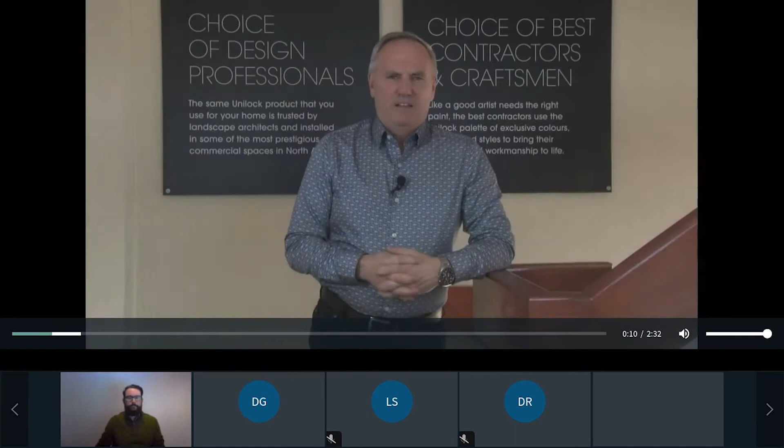Hello, my name is Dave Laurie, Sales Manager, Commercial Sales, Unilock Canada. I began at Unilock in 1997 during Unilock's 25th year in business. This year, Unilock is celebrating its 50th year in business. Unilock began with one paver named Unistone, available in a single color. We now have a 170-page catalog featuring a large variety of products. When I began at Unilock, I was one of 5 sales reps in Canada. We now have 18 sales reps, including our newly added Quebec business operation. Our sales have grown significantly, and the size and number of production plants have also increased, both here in Canada as well in the US, centered around the Great Lakes. Unilock began with commercial projects in 1972 with the Unistone, then grew tremendously in the residential marketplace, becoming a significantly well-marketed household product name for many years.

Approximately 20 years ago, Unilock began to renew our focus on the commercial world of spec build projects. Sales reps like myself in Ontario, as well in New York and Chicago, moved from an all-round sales rep role looking after both residential and commercial business to a focus on commercial work only. With a high level of focus on commercial work, the emphasis was on getting Unilock specified by architects, landscape architects, and engineers. This led to a significant focus on doing lunch and learn presentations to this audience, working hard to become the most sought after company for commercial projects, product supply for pavements and retaining walls. Like the lunch and learns that Unilock sales reps have presented for many years now, the company's long-term objective is to provide the most current information to ensure all the best practices are being followed in both the design and construction of the systems that Unilock products are used within. Unilock understands that not only do our products need to be of the highest quality, but the partnership between our firm and yours in working towards high quality installations is of the utmost importance. We are proud to bring to all of you our 2022 UTech Virtual Specifier Education Series. Thank you.

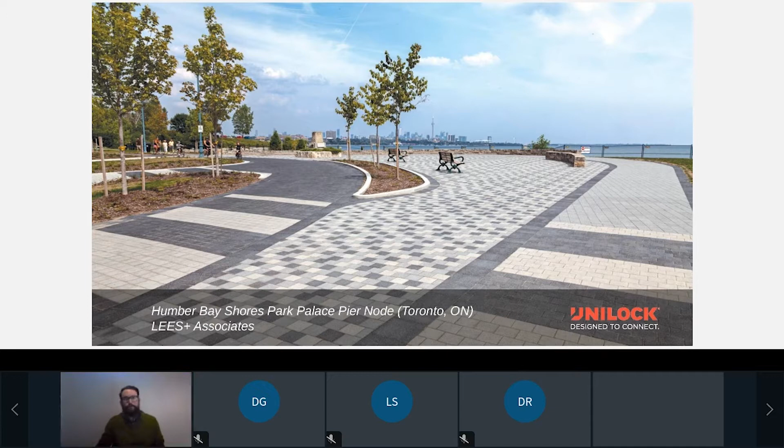Just going to have a quick look at our team. We have a large commercial team of professionals across Unilock locations across North America, all ready to assist you. We have 65 territory managers serving contractors and dealers in your area. We actually have David Roscoe, who's joined us today from the US, from our Ohio market. So for any of our American friends that have joined us today, if you have any specific questions on the US, please feel free to ask Dave.

Locally, in the GTA, we have a dedicated commercial sales team servicing the design community, engineers, and commercial contractors, with a focus on the GTA. We also have 4 territory managers looking after the outlying areas of Southern Ontario, from the Golden Horseshoe to the Ottawa region, and all the way north to the Georgian Bay region. We also have 3 project administrators to support our Unilock commercial team.

Here's just a look at some of our locations, or all of our locations rather. We have 18 manufacturing facilities spread out across 13 locations in Canada and the US.

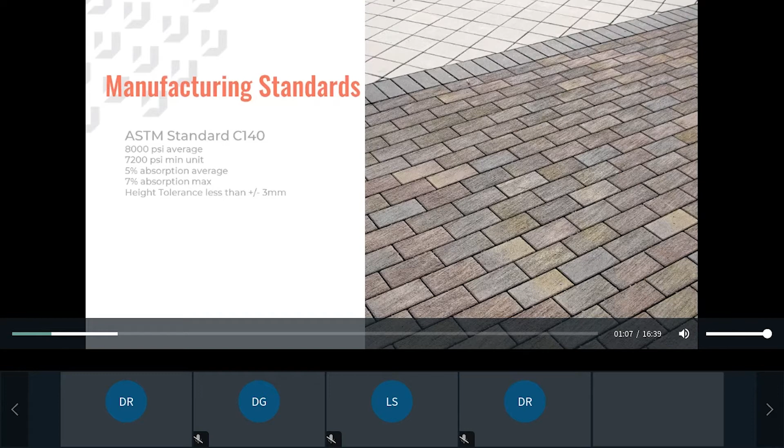Finishes. In order to specify concrete unit paving products, you must have an understanding of what is available on the market, so we will briefly discuss some of the finishes Unilock has to offer. Classic: our classic finish is tried and true. It is frequently used and provides a durable and familiar option when working with tighter budgets. These products utilize a traditional product mix of large and small aggregates that are consistent from top to bottom, with color mixed throughout. It is commonly referred to as through-mix concrete.

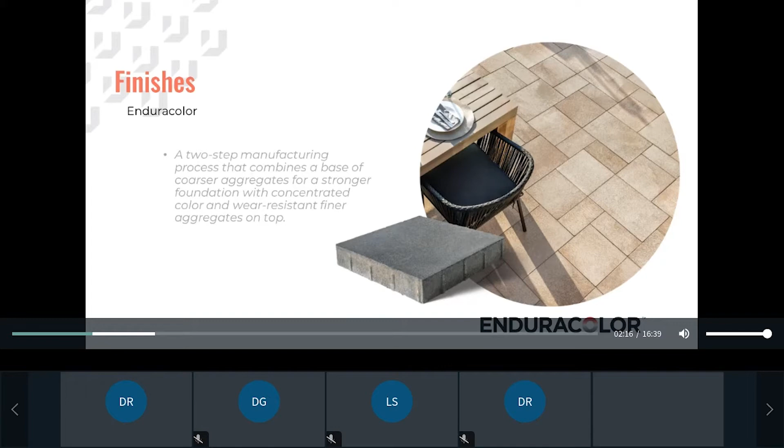EnduraColor: Unilock introduced EnduraColor, or face mix technology, in 1992. Endura Color is a two-step manufacturing process that combines a base of coarser aggregates for a stronger foundation with a concentrated color and wear-resistant finer aggregates on top. This technology allows us the ability to offer a range of unique textures and colors. The top of the paver also has a finer finish, so larger pieces of aggregate are not visible.

Elegance: our Elegance line is made using wet cast concrete, whereas other products use a dry casting method. By wet casting the pavers, we are able to offer seamless textures and colors. Our Elegance collection offers styles you can't get anywhere else. Additionally, our wet cast concrete unit pavers have a higher compressive strength for even longer lasting pavements.

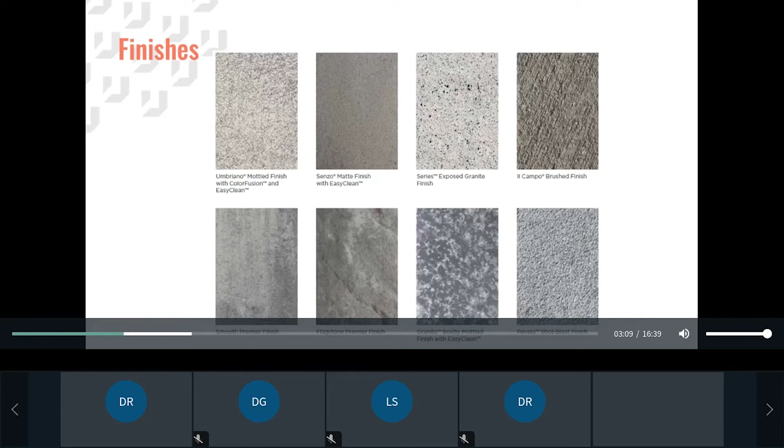Customization. Unilock allows you to customize products to suit your project's needs. Our vast array of sizes, edge details, finishes, and color options make it easy to achieve your design vision. Of course, minimum quantities would apply, so speak to your Unilock representative about the custom options available in your market.

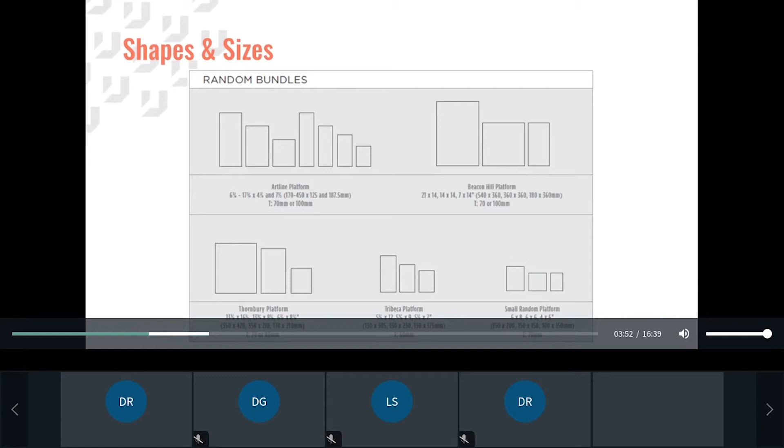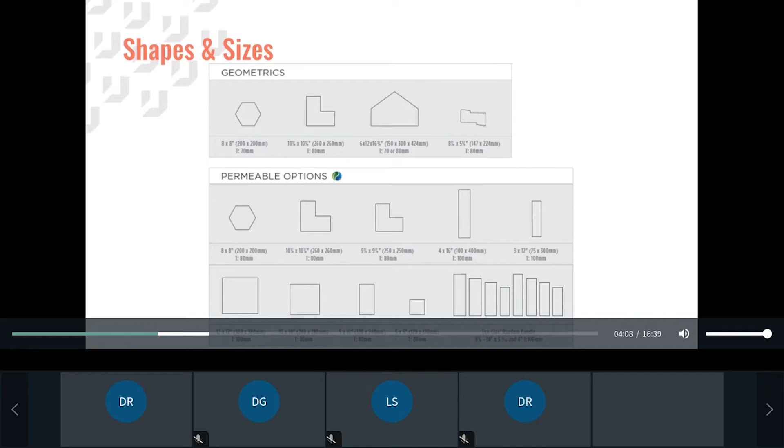Shapes and sizes. Unilock can produce product in a large selection of shapes, sizes, and thicknesses, from slabs and squares to numerous rectangular and plank paver options. We have random bundles in varying size configurations. We also have geometric shapes and a large selection of permeable paver options. We regularly add paver molds to our collection as needed, usually dictated by a designer's need for a specific size and shape. Reach out to us for more information.

Design considerations. Equally important to loading considerations are the laying pattern and aspect ratio of unit paving. When designing a unit paving system, we recommend, when possible, a herringbone or double herringbone pattern for areas that will receive vehicular traffic. Aspect ratio is a relationship between the thickness of the unit paver versus its longest side.

A general rule is, for heavy vehicular loading, a 3:1 aspect ratio should be maintained. For light vehicular loading, a 4:1 aspect ratio, and all other paving sizes are considered pedestrian only. Other specialized pavers such as our Optiloc, Bronte Street Paver, and our new Load Lock Paver are excellent for heavy vehicular loads due to their specific lock-up technology features. Of course, when in doubt, consult with your local Unilock rep, and we can go through all the options available.

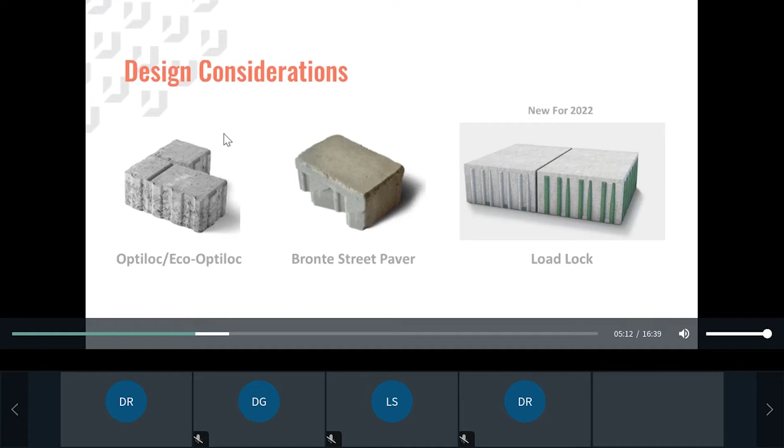Another consideration would be to design your pavement using a reinforced pavement structure. DriveCel is a reinforced soil structure product that enhances the performance of a pavement structure. I'll now play a short video to further explain how it functions.

The addition of DriveCel within pavement structures maximizes the strength, stiffness, and resilience. To help understand this, we will discuss how pavements fail, how DriveCel works to prevent failures, why this is important, where we can use DriveCel, and the benefits that DriveCel provides.

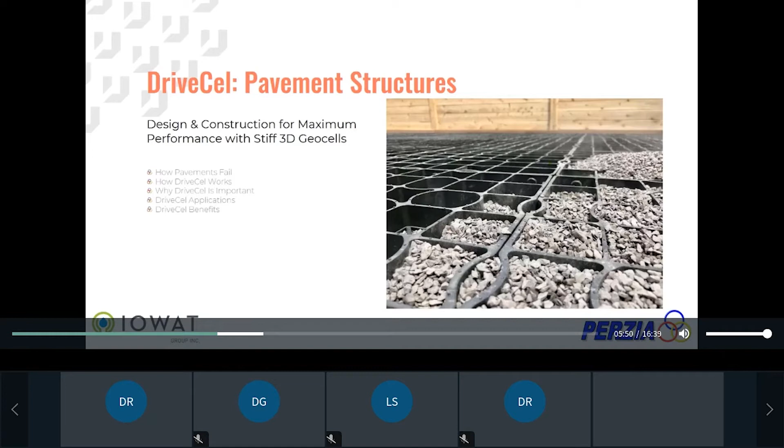Pavement structures are strong in compression but weak in tension. They can fail in different locations, from different causes and mechanisms, but ultimately they fail in tension.

DriveCel stiff geocells strengthen pavement structures by combining the best of both worlds from geogrids and flexible geocells, by reinforcing and confining. This results in the maximum strength, stiffness, and most importantly, resilience for flexible pavement structures.

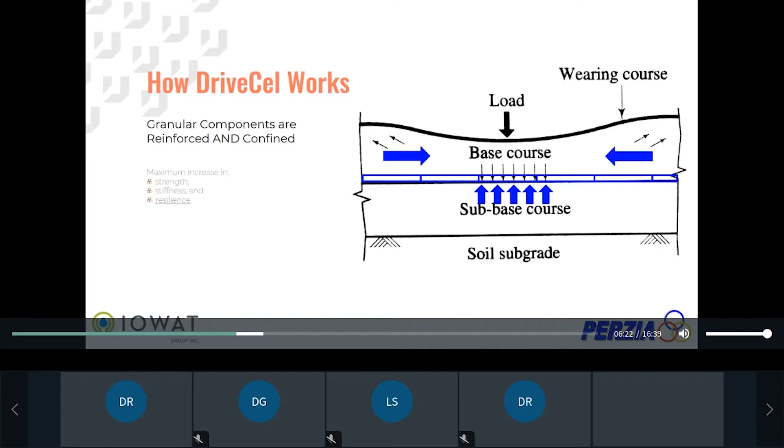DriveCel can be used in the base layer on decent subgrades, and directly on weaker subgrades like a snowshoe, to reduce the pressure on the subgrade.

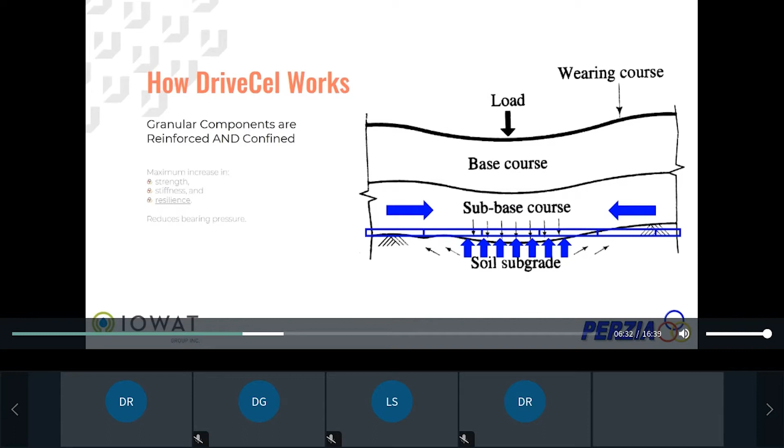DriveCel can be added into conventional unreinforced pavement structures to significantly increase their strength and performance. Or you can take advantage of the strength increase by reducing the thickness to reduce the excavation and granulars, while maintaining a similar or greater strength when compared to the original unreinforced section.

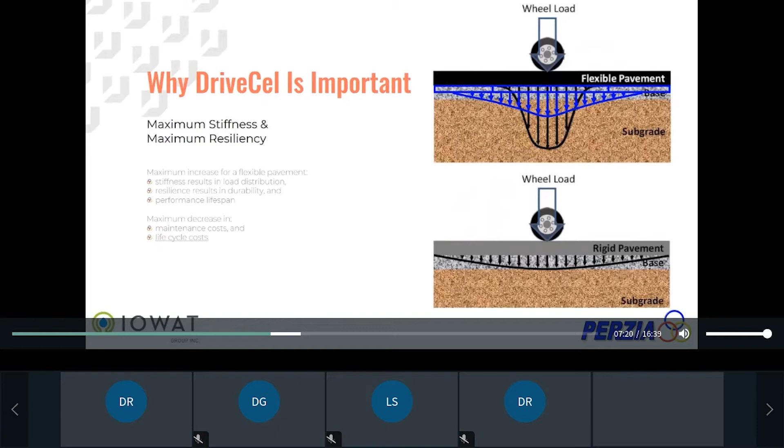Here is a comparison of the wheel load distribution for a flexible versus rigid pavement. In a flexible pavement, DriveCel maximizes the stiffness to increase the load distribution and maximizes the resilience to increase the durability. Together, these maximize the performance lifespan. Ultimately, this reduces maintenance costs and minimizes life cycle costs.

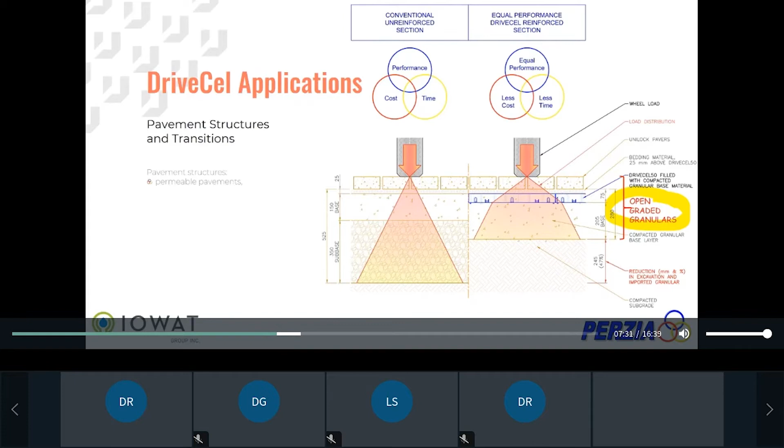For permeable pavement structures, the base and subbase are typically composed of open graded granulars. The design priorities are structural first and then drainage.

A rigid and impermeable concrete base layer is a mistake under a flexible and permeable concrete paver's driving surface. The concrete should be replaced with DriveCel. As shown on the very right, two layers of DriveCel can be used in pavement structures, one on the base and one on the subgrade, to further increase the reinforced strength and minimize the excavation and granulars.

Tension cracks typically form at transitions from one type of pavement to another. Installing two layers of DriveCel along the transition helps smooth the transition and prevent cracking.

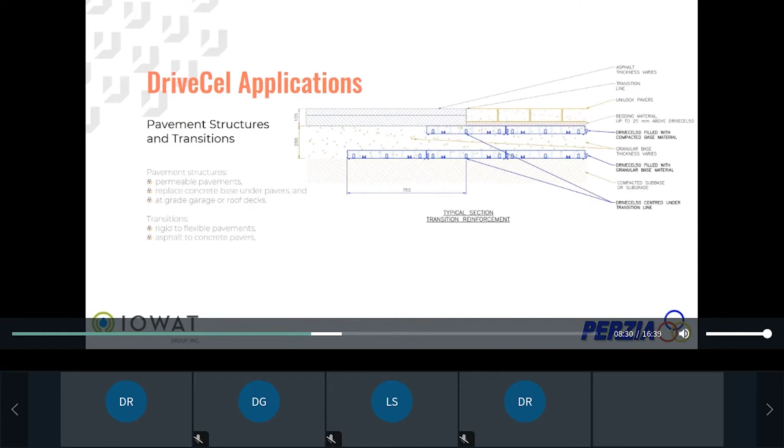Too often, pavements and curbs break up around catch basins. Installing DriveCel helps tie this area together to reduce costly repairs.

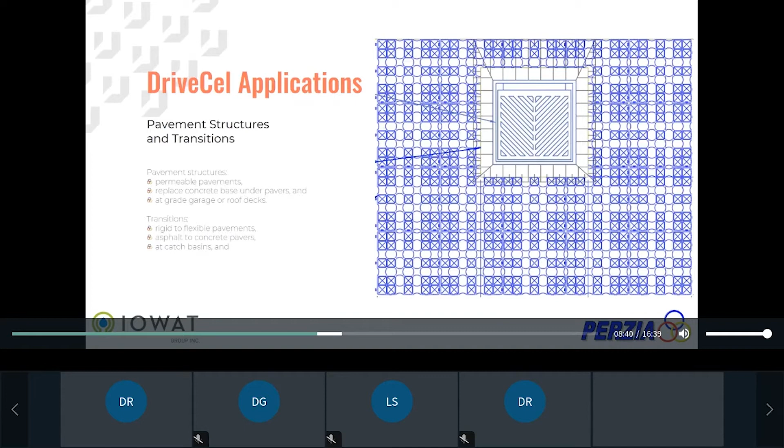Pavement structures often deform and crack over culverts. Installing DriveCel under the culvert helps spread the load and reduce the excavation required. Installing another layer above the culvert in the pavement structure helps prevent deformation and cracking.

DriveCel maximizes the long-term performance of pavement structures for maximum benefits. During construction, excavation and granulars can be reduced, plus installation is quicker and easier. This results in overall time and cost savings.

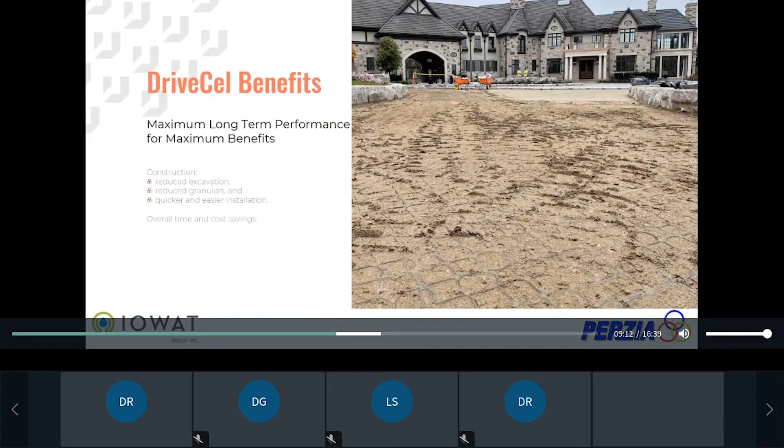Maximizing the resiliency maximizes the durability. This means more wheel passes, less maintenance, and smooth transitions.

Finally, using DriveCel has direct and indirect environmental benefits, including reducing export and imported materials, reducing truck traffic and related air and noise pollution, all while reducing the overall carbon footprint. Thank you very much.

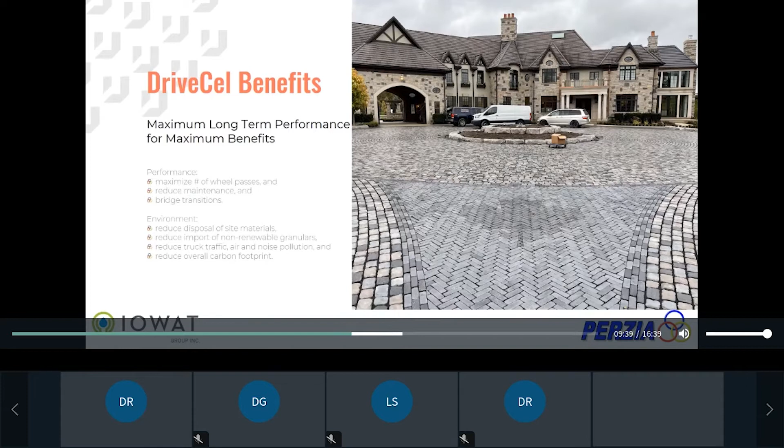Unilock Resources. As mentioned in the introduction video, we have a strong support system at Unilock. We have a growing number of territory managers in Canada and the US ready to assist you.

To go along with the boots on the ground, we have a wealth of online resources available on our website. Our website is constantly updated and is segmented into 3 target markets to better assist you: our contractors section, our home builders/homeowner section, and of course our architects and engineers section, where you will find helpful resources like product specification, numerous project images, cross sections, and hatch patterns, to name a few.

Our 2022 commercial and residential catalog of dreams are available for download on our website, or you can request a printed copy.

For the case study, we will be reviewing this amazing precedent project my colleague David Robbins worked on, Dundas Place, located in London, Ontario. The City of London had a vision to transform Dundas Street into Dundas Place, a public space and cultural hub to encourage residential intensification in the core, showcase built heritage of the area, and shape the downtown for decades to come.

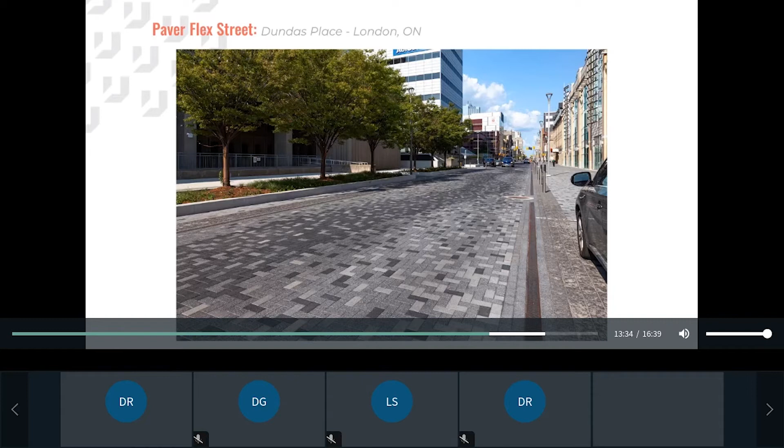The design emerged from the vision to replace the pre-existing traditional concrete sidewalk and asphalt roadway treatment with a uniquely designed interlocking concrete paver surface. The pavers allow for a seamless transition across both the vehicular and pedestrian areas, while providing roadside safety, accessibility, and engineering requirements.

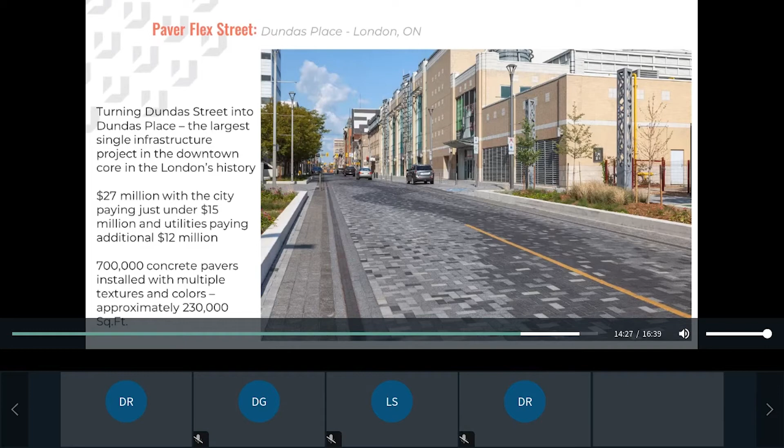The Thames River, a waterway that flows through the city, was a major hub of activity and played an important role in the history and development of London. With a desire to use Dundas Place as a gateway linking the downtown core to the riverfront, the river itself became the inspiration for the wave paving pattern meandering down the center of the street.

With such a detailed pattern, it was important for Dillon to team up with their Unilock rep, David Robbins, to further develop the wave-like pattern and to assist with any details.

Unilock was able to share our expertise through various collaborative efforts, including touring our manufacturing plant, reviewing completed projects of similar nature, to name a few.

With durability and accessibility as key design factors to consider, a custom color palette and detail pattern could easily be constructed with minimal direction once on site.

The various paver sizes, styles, surface textures, and colors help to define the pedestrian areas from the vehicular areas in a safe way. To ensure long-term durability, the pavers were installed over a concrete foundation.

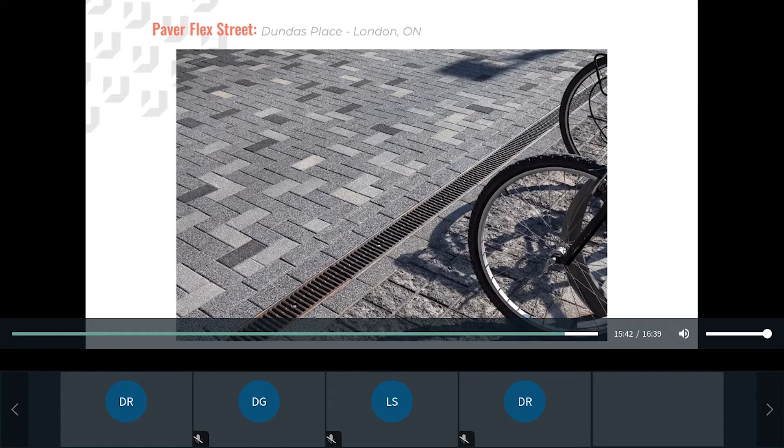Over 700,000 interlocking paving stones were laid in a herringbone pattern at Dundas Place. This laying pattern, combined with the base detail and the aspect ratio of the paving stones, are key design considerations when designing for vehicular movement, allowing the paving surface to support both pedestrian and heavy-duty car and truck traffic.

Here are some of the unique features of this flex street. The paving pattern mimics a river. No curbs, making it great for accessibility. Textured pavers delineate the pedestrian zone from the vehicular roadway. Removable objects, including seating, bollards, planters, and some of the lighting.

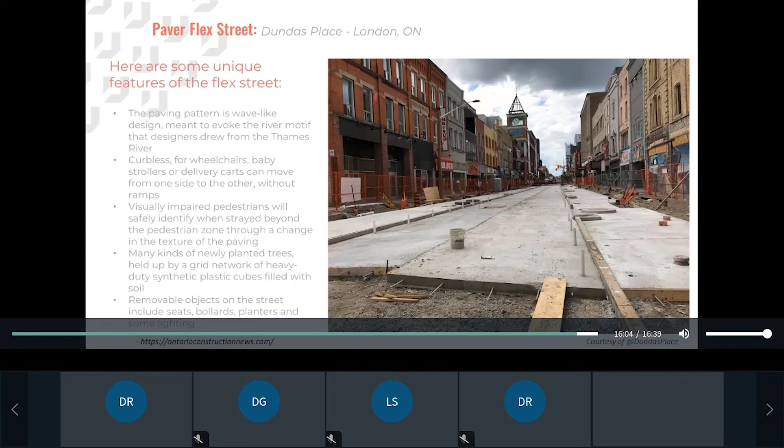Dundas Place has already proven the extent to which the program fulfills the vision set in London's downtown plan to make Dundas Street into the most exciting street in London.

Dundas Place was not just a street reconstruction project, but is part of a long-term strategy to re-envision downtown London. Dundas Place is a dynamic and inviting destination in the city and has become the benchmark for future flex streets in Canada.

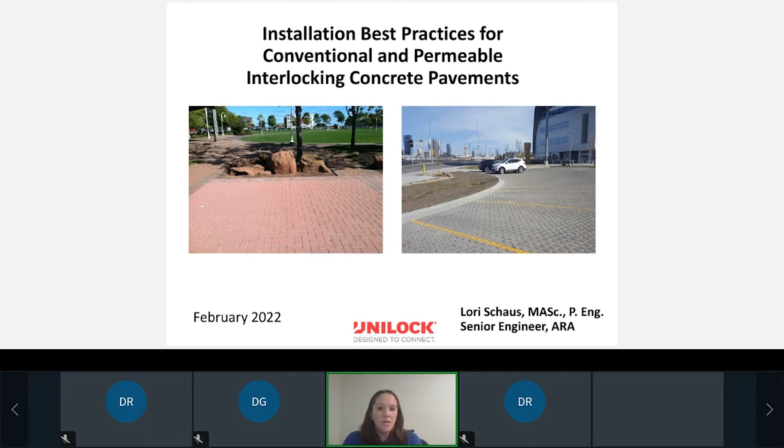So today I'm just going to show you a couple examples of what conventional and interlocking concrete pavements are for those that may not know. I'm going to go through a little bit of really basic pavement design and what we do as designers and what we're looking for. I'm going to talk about some of the bases and sub-bases we use to support our pavements, and then key features, materials and installation. And then we're going to talk about best practices, which is really a bunch of pictures of what not to do, and hopefully we can learn some things here.

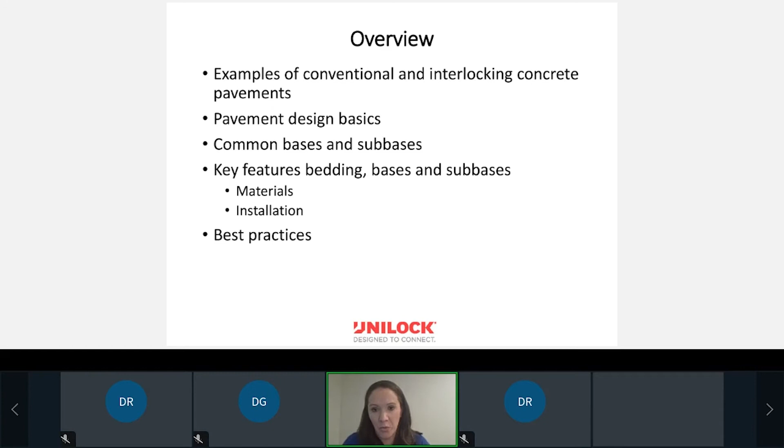So I have a lot to cover, so I'm going to touch on just some key points. There's lots of information out there to help you if you want more details, or we can discuss in the questions and answer period at the end, or offline as well. So I'm just going to run through some stuff a little bit quick, but I hope you'll learn something.

I want you to understand just a little bit about the basics of pavement engineering and what we're thinking about when we have to design these systems. Understanding the importance, particularly when we're talking about interlocking concrete pavement, of your bedding, your bases and your sub-bases, also including your subgrade, and then recognizing good practices.

All right, so interlocking concrete pavement, or ICP. Let's just generally look at what they're good for, and unfortunately, what are some of their disadvantages. One of the really great things, and Danny had a really great presentation there that highlighted some of the good things, is that we can do lots of fun things with them.

We can do colors and textures and different layouts, and landscape architects love this because they get to be really creative. From my perspective as a pavement engineer, I like that I know what we're getting - those blocks are manufactured to ASTM standards, as Danny said, so I know what we're getting. The problem with some other pavement options is you don't know what you're getting until you actually get it into the field. That's one of the nice advantages - we get these blocks delivered with high quality standards already in place.

If you compare it against concrete pavement, typically over the long life cycle cost, they tend to be cheaper than concrete pavement. One of the things I absolutely love - I did a major project on utility cuts. Utility cuts are the bane of my existence as a pavement engineer, because nothing hurts more than doing a brand new road and then having someone rip it up to put a utility cut in. A paving project is really great because you can pick up the pavers, dig, do whatever you need to do for your utility, whether installation or fixing it, put the pavers back in place, and most people won't even know what happened - which doesn't generally happen with concrete or asphalt pavements.

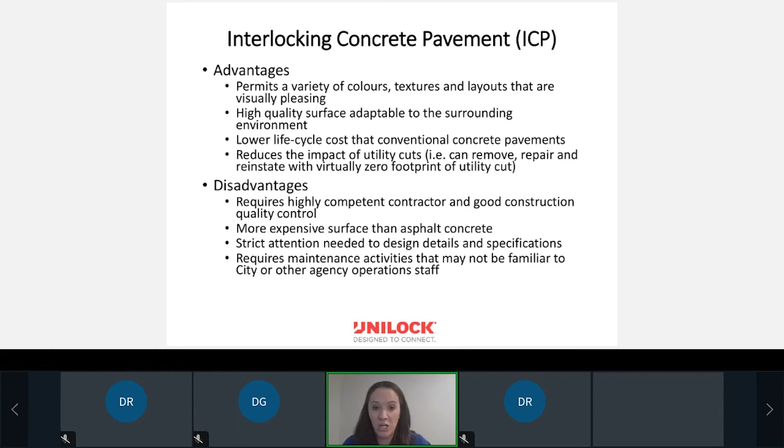Again, real special attention has to be paid to these kinds of things. And on the maintenance side, we want to make sure that operations and maintenance staff, for those that work in municipalities, understand that these pavements are different and how we maintain them is different. We're not just going to throw cold patch in them if there's a problem with an area of the paver. So sometimes there's retraining of city staff because it's not just how we've always done it. Those are all really key things we need to keep in mind.

Just a couple quick examples of some of the interlocking concrete pavements around. City of North Bay has one that's almost 40 years old. It's considered what we call a flexible pavement - I'll talk about what that is in a minute.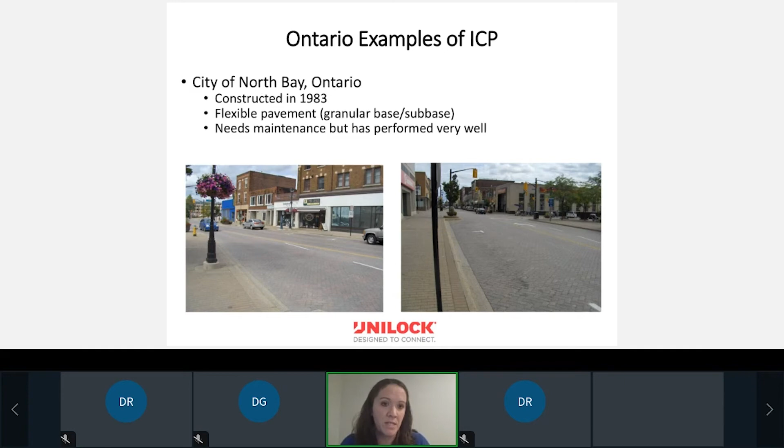It's sitting on a granular base. It needs a little bit of maintenance, but it has performed really, really well.

Dundas Place, I use that example as well. I was born and raised in London, so I'm very, very proud of this project. Dundas was not the best place to be growing up when I was a kid, so this is absolutely amazing to see. Again, as Danny described, you've got the wave mimicking down to the Thames River at the waterfront. Wonderful project, lots of neat things. I've got more pictures from that coming up in a few minutes.

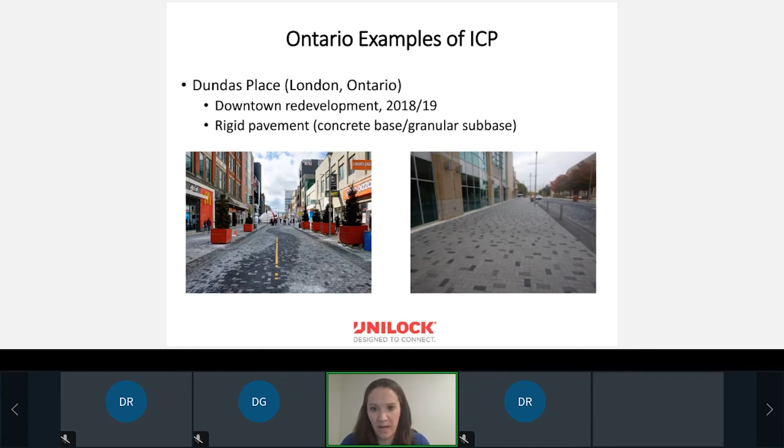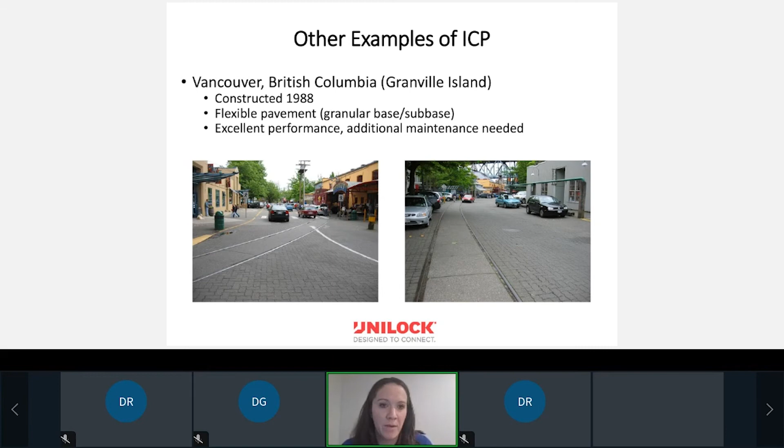Now let's go to Western Canada, Granville Island. It was constructed also in the 80s. Again, it's a paver project considered a flexible pavement on granular sub-base material. It's performing excellently, although as with most any type of pavement, there's always some additional maintenance generally required.

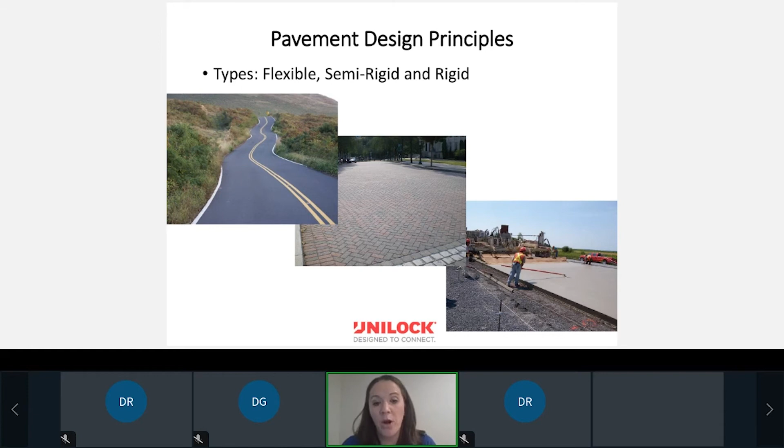All right, so let's quickly touch on pavement design principles. There's really three principles, but it comes down to two. The first is flexible - that's what we see with blacktop or asphalt, flexible pavement. The idea is it's meant to move, meant to be flexible. Then we have pavers, which fall into what we call semi-rigid, because the pavers themselves are rigid, but it behaves more like a flexible pavement - we treat it like a flexible pavement when doing design, so it's semi-rigid or flexible. And then on the bottom right, we have traditional concrete, or Portland cement concrete pavement.

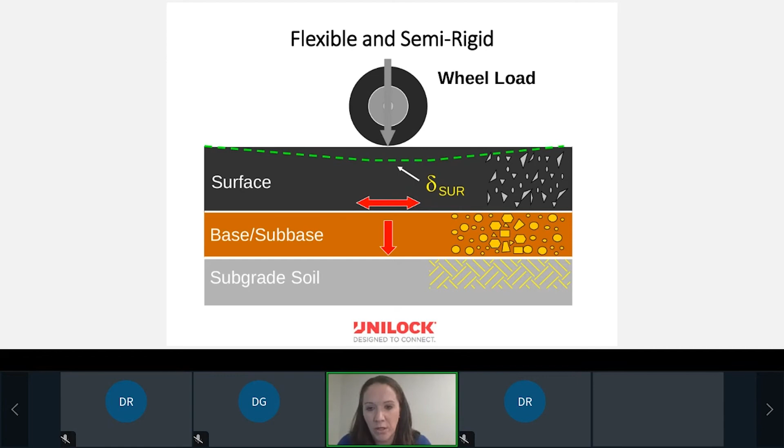So really quickly, flexible and semi-rigid - we saw a little video there just previously. What happens when the load goes over a flexible pavement? You get higher stresses right underneath the load, and then it filters down into the base and sub-base and into your subgrade soils. So when we talk about pavers or asphalt, that's what we're talking about - you've got movement, direct high stresses right under the load. For rigid pavement, or Portland cement concrete pavement, the load is spread out over the concrete slab. There are various reasons why you would do one or the other - they each have their advantages and disadvantages.

In terms of design specifications, information, and design tables, the ASCE, the American Society of Civil Engineers, has design standards for both traditional interlocking concrete pavements as well as permeable interlocking concrete pavement. They are available for you to use, and they are really great documents, constantly reviewed and updated on a 5-year cycle. There's lots of great information in there to help you if you're looking for design guidance on either type of these pavements.

Just a quick thing on how we do work sometimes: we try to figure out what kind of base we're going to do under a road. So this is an idea of what we call an equivalent design comparison. We're using the pavers, we're using the bedding sand, that stays the same, and then we look at various ways of what is going to support our pavement.

A traditional would be your base and sub-base made out of granular materials, that's on the far left. Or we might do an asphalt treated base, an ATB, in which case we can actually make the total pavement thickness a little bit shallower. Cement treated base, we can do asphalt concrete underneath, we can do porous concrete, we could do porous asphalt underneath. We could do lots of different things, and we can do some grid products as well.

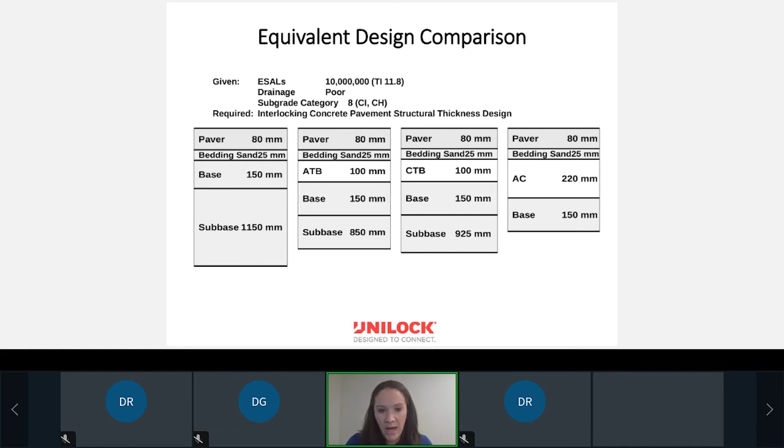So there's always pros and cons to each of these, and we try to use them wherever the site conditions require. There are hybrid products available to use in different forms of pavers and different things like that. Again, the structural grids that we've seen, those kinds of things, lots of different options out there depending on your site-specific requirements.

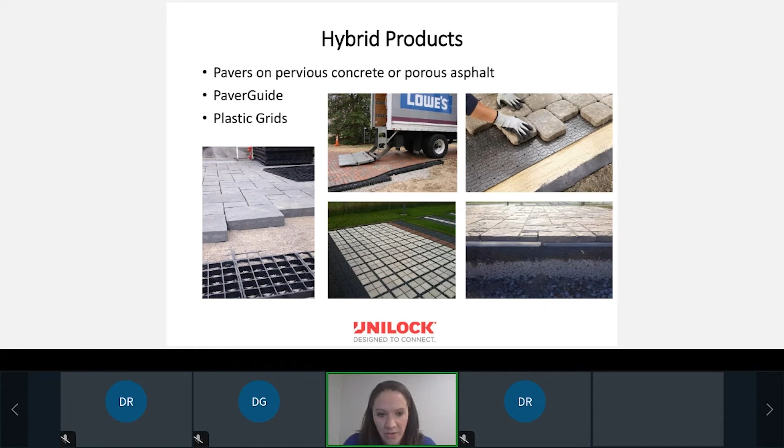So some of the key features of pavements: we've got materials, and this is really, really important. It starts right from the bottom - your subgrade or your foundation, what is it sitting on? We need to understand what it's sitting on, because then we have to design it properly based on those conditions. Then we've got our base and sub-base materials, and we decide what we're going to use for that.

Then we have our bedding and our pavers. Each of these all have to have details and specifications that need to be understood so the whole pavement system works properly. Once we've decided on the design and materials, we have to make sure it gets installed properly, and this is always a problem in all construction. We need design, materials, installation, construction, and they all have to be working cohesively. So it's really important that installation is really, really detailed and paid attention to.

Again, related to our subgrade, we want to make sure we have uniformity in our subgrade. Our pavement layers, are they designed properly? Are we using the right materials, and drainage? If you learn anything from what I'm about to tell you this afternoon, the keys to pavement design are drainage, drainage, drainage. You have to have proper drainage or the whole system can fail, with the exception of permeable pavements, which is something totally different. But we want to make sure we have drainage, because everything can go really wrong really quickly if we let water in. Water is very evil to pavement engineering.

So let's talk about subgrade. Subgrade is really important that we know what it is. We can estimate it, but we'd really like to know what it is. So one thing we want to make sure - do we have consistent subgrade down there? And then when we are dealing with it, we want to make sure we're compacting it properly. We do not want areas of non-uniformity. So we don't want a pocket of clay beside sand, or a frost susceptible material mixed in with other subgrade types, and we want to make sure it's compacted.

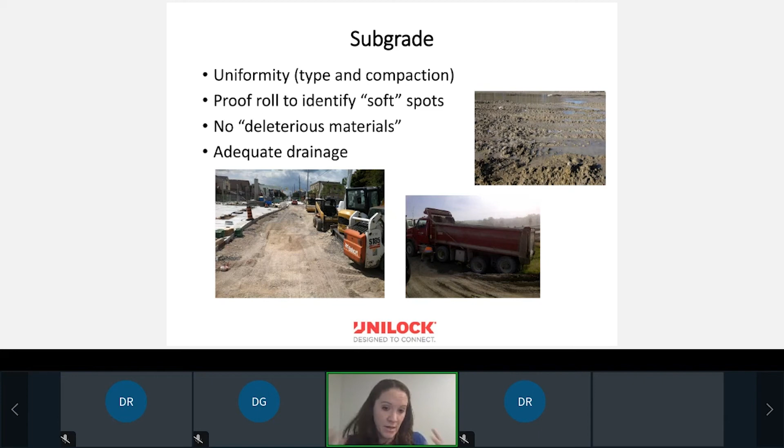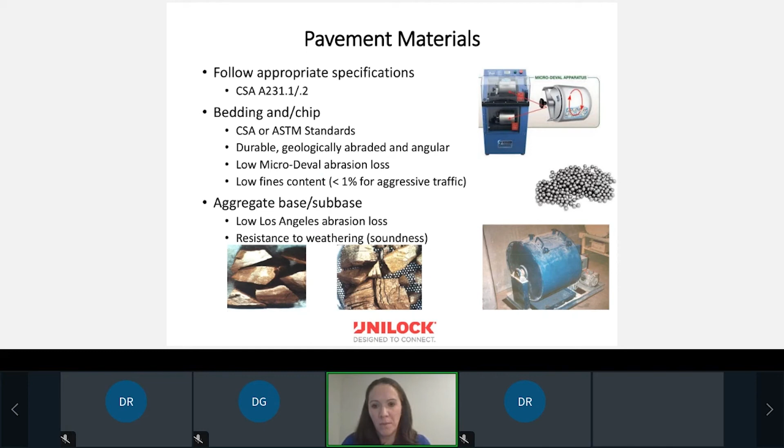Just a comment on equipment. We want to make sure we're using proper equipment for the proper jobs. Let's be using full 5-ton rollers for roadways and plate compactors for smaller areas. We don't want to be using a plate compactor on a major road. So again, appropriate equipment for the type of work that you're doing on your site.

Geosynthetics or geotextiles, different forms of that we can use in our pavements. Sometimes we use them for structural improvement, layer separation, filtration, drainage, and waterproofing. Again, all of these are site specific - that's why it's very important. No two designs are similar. You want to know everything about your site and what you might need something like this for.

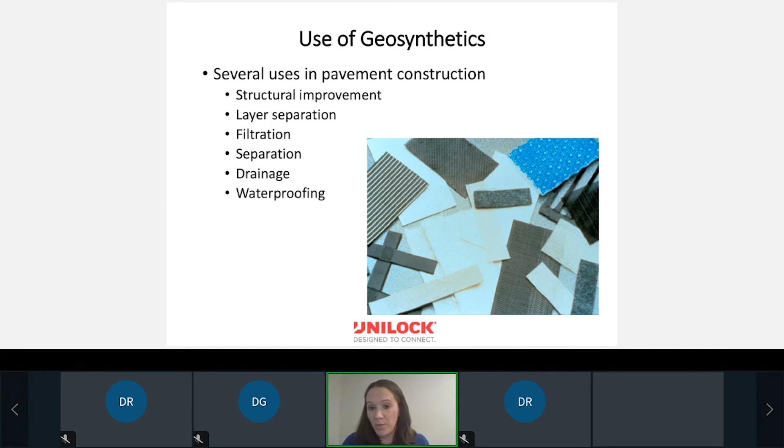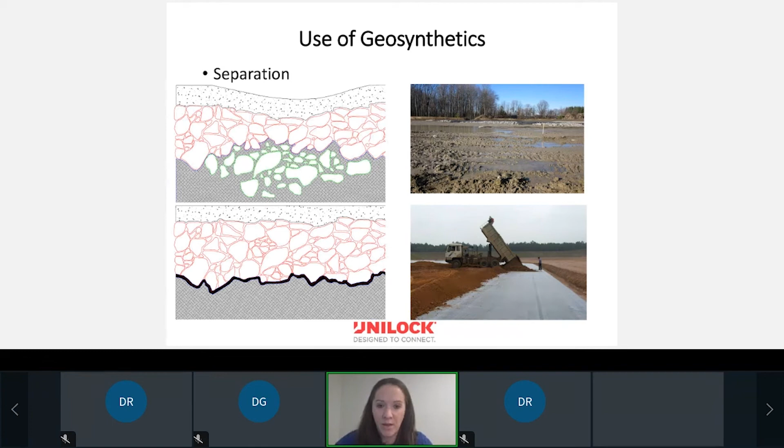So here's an example of separation. Again, I talked about uniform subgrade - well, subgrade is really expensive to sub-excavate, so sometimes we have to find an engineering solution to deal with it. One of those might be using a geosynthetic to provide a little bit more stability so that we don't lose our base and sub-base material into the subgrade, and then we start to get a whole bunch of problems associated with that. So separation can be used.

This is a permeable application where we're using it to separate some of our layers, just to make sure our layers were staying where they were, because in a permeable application we don't get nearly the compaction that we would under a normal pavement section.

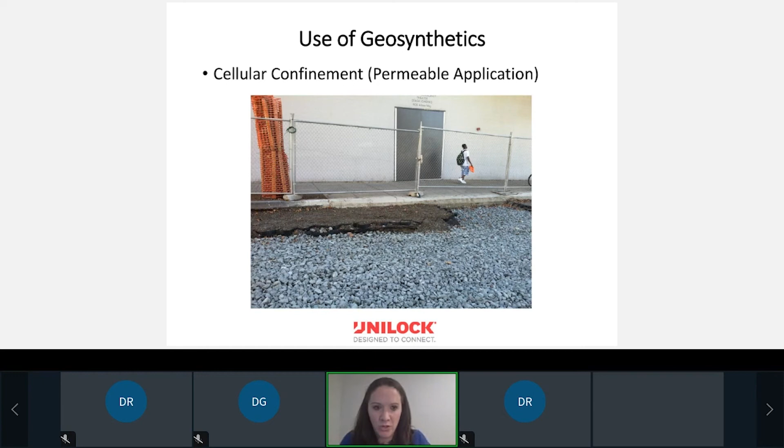We've used them in cellular confinement type areas. This is Allston Way in Berkeley, California. And when we got to the tree roots, we couldn't sub-excavate near them, so we had to bring the pavement structure a little bit thinner. We used cellular confinement around the tree roots in order to protect those trees, but also give us the strength required to support the traffic.

It can be used on driveways as well. Here's an example using it for structural reinforcement going up against a concrete foundation wall.

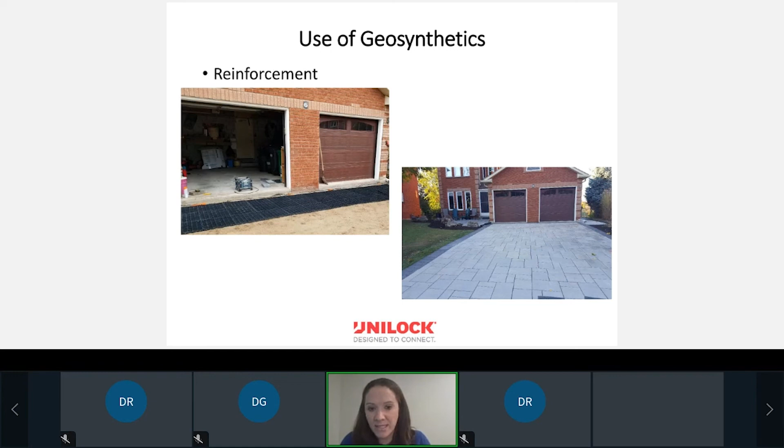So I'm going to briefly talk about permeable pavements. This is a completely different way to think about pavements - it's a stormwater management best practice. In this case the pavers themselves are not permeable, but the joints between them are. So instead of sand between them to get your interlock, they're a different type of paver, and we put a joint filler with bigger joint filler stones with no fines in it, and the water filters through into our base or subbase.

Once it gets into our base or subbase, we've got open porosity here - this is our storage reservoir. Water is going to stay there for maybe 24 to 48 hours, depending on our hydrological goals. Then either it's going to infiltrate into the subgrade, or in this picture, there's a geotextile forcing it into a subdrain. The point of this is to slow surface runoff down - instead of racing off the pavement into the curbs and catch basins, we slow it down. This is stormwater management where we're balancing structural and hydrological things.

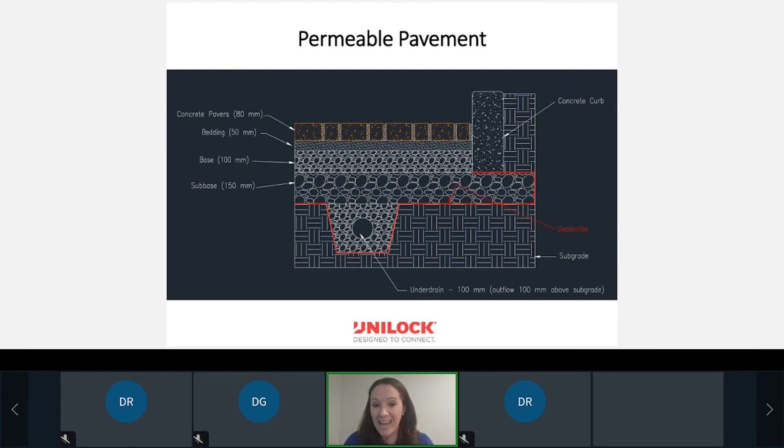So on permeable pavements, the materials look a little different - there's no fines, absolutely no fines. We've got our subbase here with big rocks, right? We want that high porosity.

You're talking 30 to 40% porosity in your subbase. Then we've got our base material, a little bit more structural component, but still high porosity. And then we see our joint filler there as well.

Really important in permeable pavements, the materials have to be clean, no fines, because these types of pavements will get clogged. We don't want to start clogged. We want to make sure we're getting the maximum porosity at the beginning, so we've got to make sure those stones are cleaned.

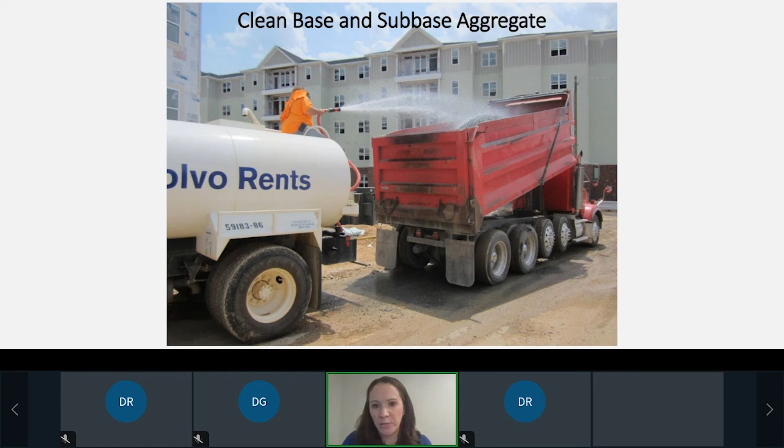When we're doing subbase and base preparation for permeable, it is different than if we're doing conventional pavers. This time we do need compaction, but not at the same level, because if we over compact a permeable base or subbase, we will lose our porosity. So it's a balance between getting some compaction for structural support while maintaining our porosity.

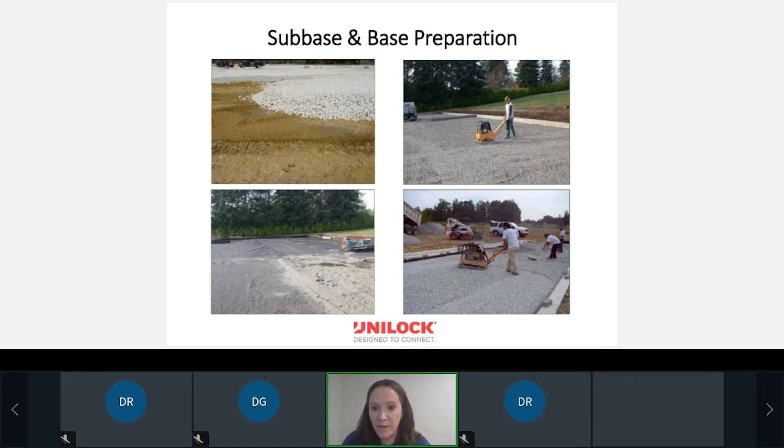So again, it's very important that the contractor understands how to do these, that the specifications are written properly, and that all the stakeholders for permeable pavements understand that this is not how we've always done it, or how we do conventional pavements.

Paver installation, for permeable or conventional, is the same. We highly recommend some kind of mechanical installation. Obviously it makes it more efficient, and there's health and safety benefits for the workers involved.

One of the beautiful things about pavers is there's no curing. Again, they come to site ready to go, so once it's ready, we can open to traffic fairly quickly. And the nice thing about pavers is they can always be reinstated after repairs or if they're damaged.

Back to one of the questions about paver supply, always make sure that you are ordering more pavers than what is required, because you will need them to replace damaged pavers, utility cuts if you need them, those kinds of things. So always important to have a little extra pavers on hand.

Very, very important: for the permeable paver, the joint aggregate installation is really important. Again, we need it for that interlock of our pavers, but then we also need it to pull that water in through the pavement. So as you can see, there's no fines. It's spread into the joints, compacted in, and then this has to be maintained. It has to be cleaned out and reinstated on a somewhat regular basis.

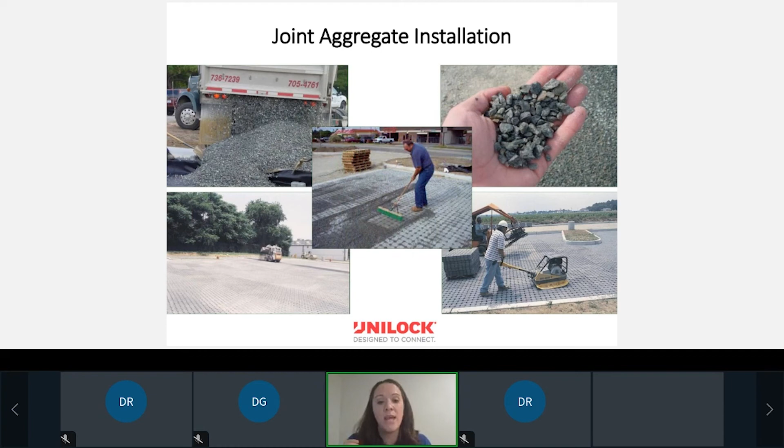Really, really important. At the end, this is just kind of a cross-section of what a completed permeable pavement would look like. So if you're used to seeing traditional, conventional pavements, it looks very different. As you can see, there's no fine materials here at all.

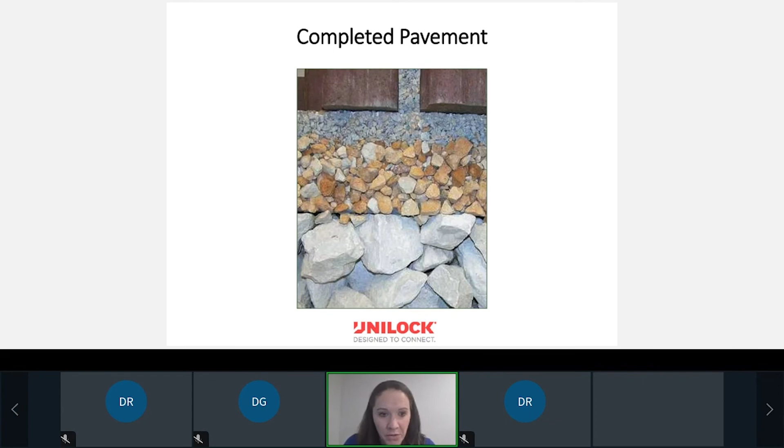All right, so let's quickly get to some of the installation and detailing, I'm going to run through this. Again, uniformity is really important at the subgrade level, at the materials. We want to make sure uniform compaction, uniform materials. Otherwise, that can start to increase our rate of deterioration.

Thickness design is really important. We want to make sure we're designing for vehicles, pedestrians, understanding what is going to be using it - that's our loading. Again, the materials for permeable and conventional are very different, so we want to make sure we're using the correct ones.

Again, uniform support for the pavement is really, really important - what are you building it on, what's your subgrade? I'm going to talk about some edge restraints that are really important for pavers. We want to make sure they have something they can push against under loading, and that they're not going to just slide away on us.

Drainage, again, very important, both surface and subsurface, particularly really important for our conventionals. Again, water is absolutely detrimental to a pavement.

And then how we actually install our paving units - this is a paver job that is on concrete. So the key with concrete here is we've got to build a concrete pavement properly too. Concrete likes to be square, so we're going to make it square, or it will make itself square. So we make sure we put in the joints before, proper jointing of all the concrete, and then we put the pavers on top.

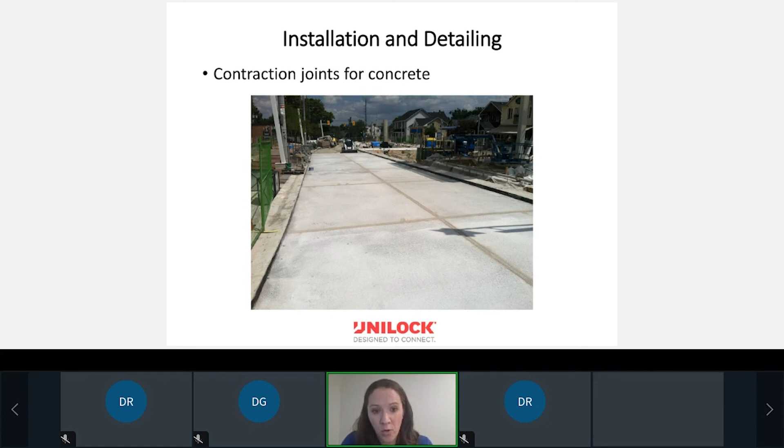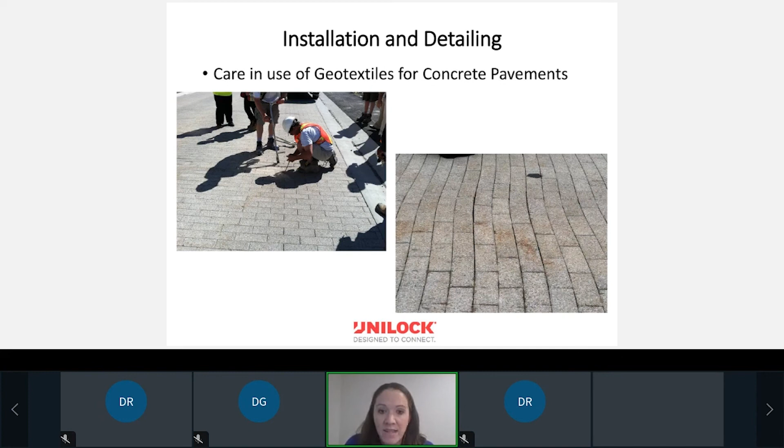Here's an example of where a geotextile was used between concrete and pavers. We have to make sure it goes down properly, or we could get some horizontal shift. And in this case, this was opened up, and what had happened is it was not installed properly.

It shifted the bedding sand, and then the pavers shifted around. It doesn't look very nice, and you're losing that interlock, and it's now not performing as intended.

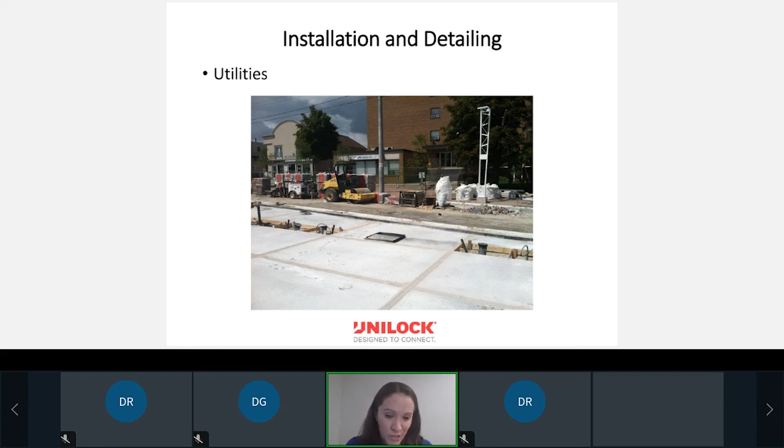Here's another example of our utilities. Utilities damage pavements, so we want to make sure people have access to them. The more detail we can put around our utilities is really important, because believe it or not, the utilities have the right to be there, although I wish they didn't, and they have to be able to access them to repair or install. So we want to find nice ways for them to get to their utilities.

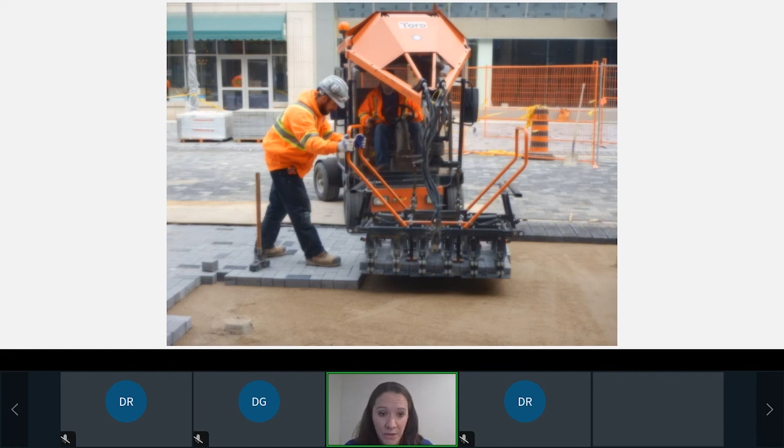Here's just a picture of mechanical installation. Again, it's efficient, and for the health and safety of our workers, really, really important.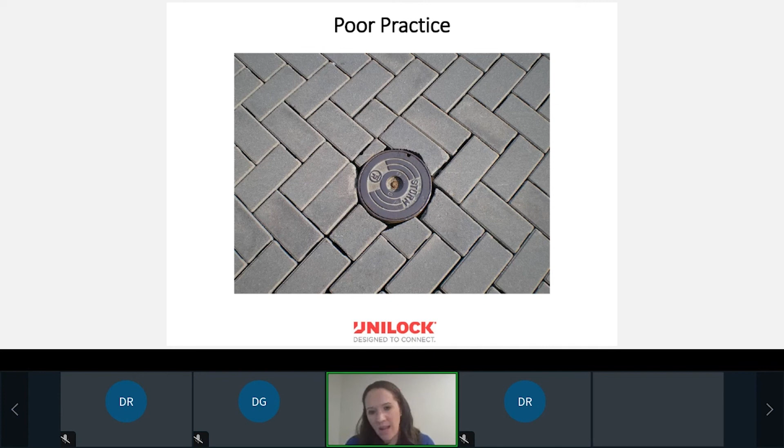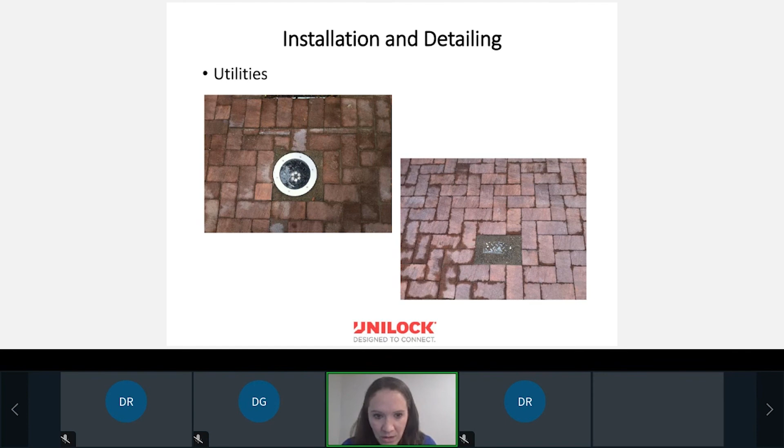Here's another example where they didn't even bother to put the pavers close to the utilities. You might as well just put a big sign saying 'water come here right now.' So water's going to infiltrate into that right away. Those pavers are going to start to move, and it's going to wash away bedding sand.

Here's Dundas Place again in London. We can see the detail around the utility cut cover here is perfect - it's a concrete collar, nice paver cuts. Again, not all of them are perfect, but minimizing small cuts is best as possible.

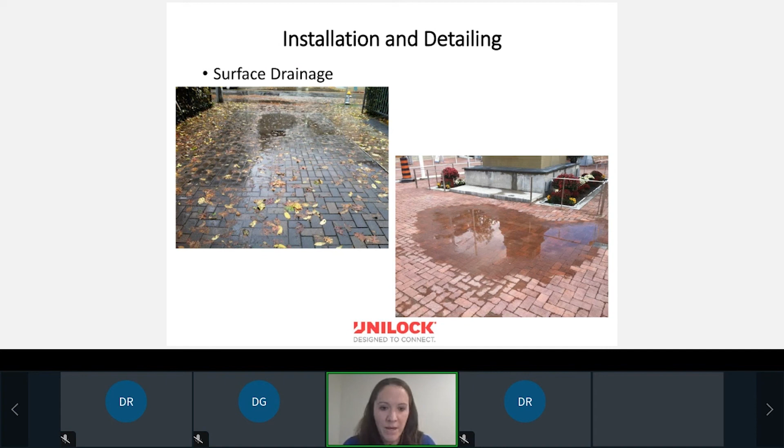Really important, subsurface drainage and surface drainage. These are both pavers, and water is going to sit there. Eventually, even though they're considered impermeable, it will infiltrate into the system, potentially washing away bedding sand, getting into our sub-base space, all that kind of stuff, increasing our rates of deterioration.

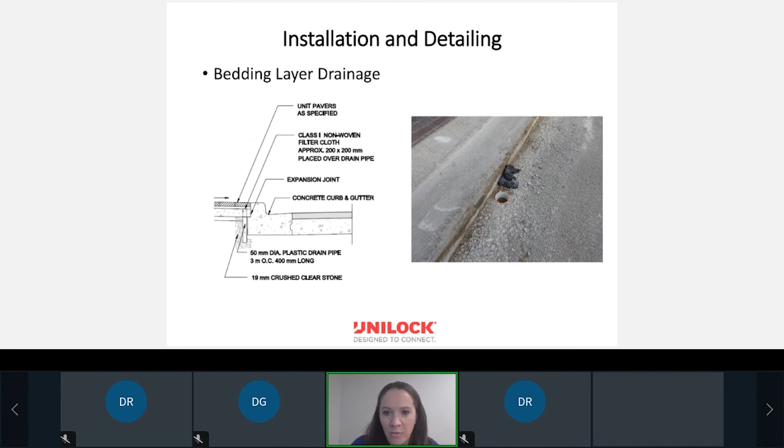Here's an example of bedding layer drainage. We've actually got plastic pipes put in, really important to help any water that's coming in get away. Typically during construction these are covered up - please uncover them before you put the pavers down so we can actually use them as functional drains, not plugged before we've even started. We've had a couple cases of that, which is really frustrating. Really, really important.

Here's an example of an expansion joint under, this is a parking garage underneath. Here's a pro tip from a pavement engineer: if you've got grass in your joints, you've got a drainage problem. If you can grow grass, you've got water. So it's really important that we make sure we deal with the water.

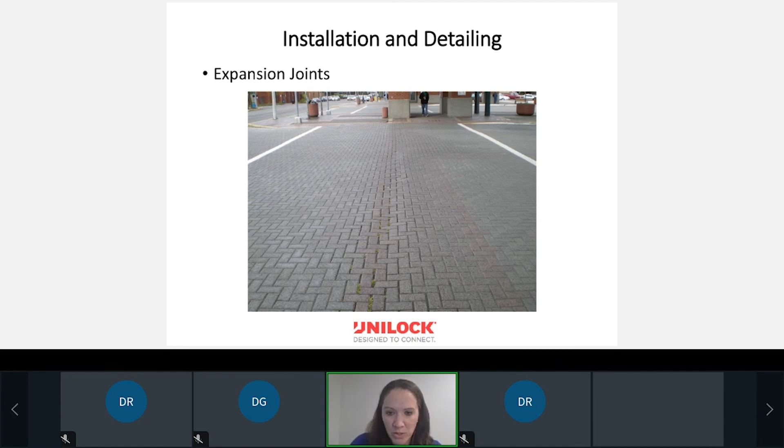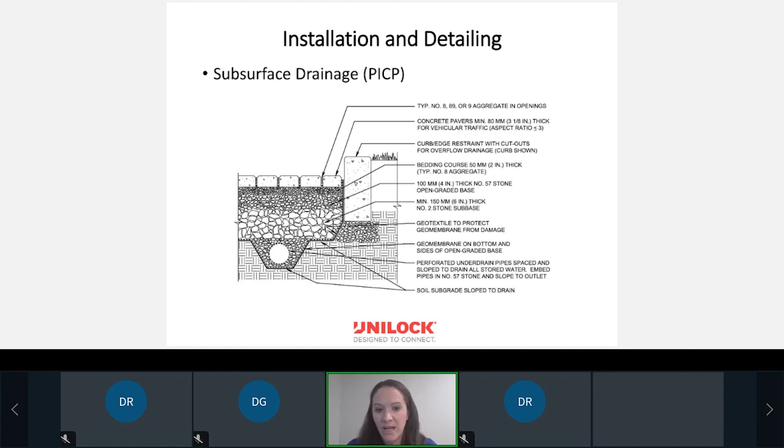Here's an example of a permeable installation with subsurface drainage. Again, we've put in that drain pipe. The idea is the water now stays in the system for longer, 24 to 72 hours, and then goes into the drain pipes and drains away. Here's an example of non-uniformity support, so really important.

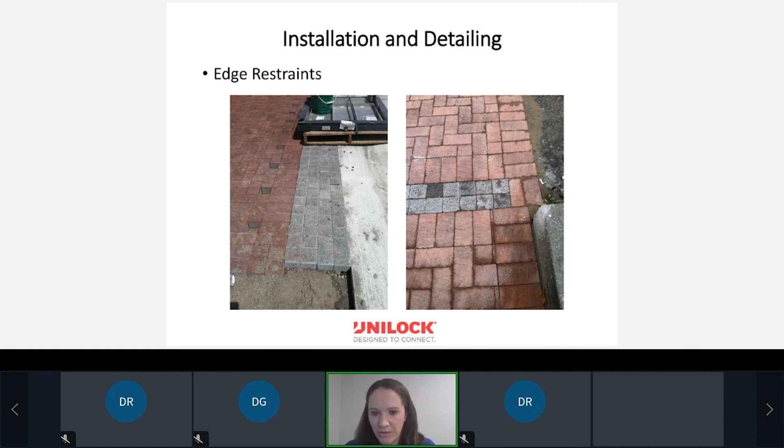Not an ideal situation. Here's an example of edge restraints, really, really important. On the left, we've got a concrete edge restraint. It's holding the pavers in place in case they, under loading, there's no movement. But on the right, there's nothing holding those pavers in place, so they eventually could shift and cause issues in your surface.

Here's another good example of an edge restraint. Here's a concrete with a sailor course of pavers. Again, there's some small cut pavers there. It's not perfect, but much better than we've seen historically. That gives extra stability. Those pavers are going to push up against that concrete and they're not going to go anywhere.

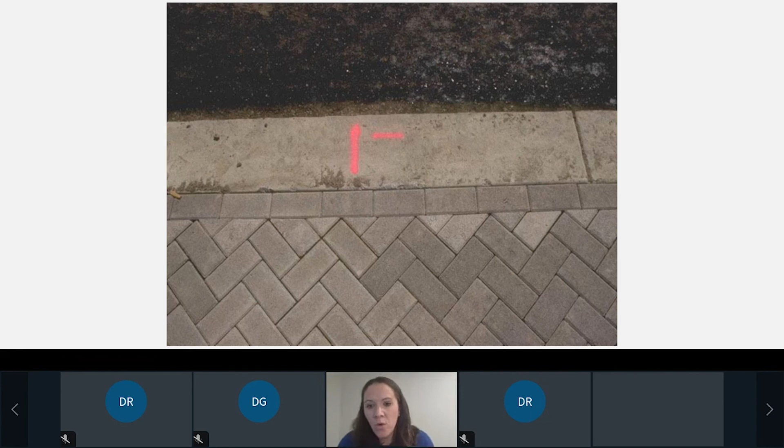What happens when we put pavers up against asphalt? They don't like each other. Concrete and asphalt do not like each other. They move and they behave very differently. So we've got movement. This is what happens. You can see we've got the hole, basically a pothole opening up, and that's just going to let water infiltrate in there. That's going to cause issues on the asphalt side.

It's also going to cause issues on the paver side. Here's one that's not too bad, but again, that joint is opening up, and eventually, depending on the types of loading, you get more heavy trucks in there, it's just going to push. It's going to crack that asphalt.

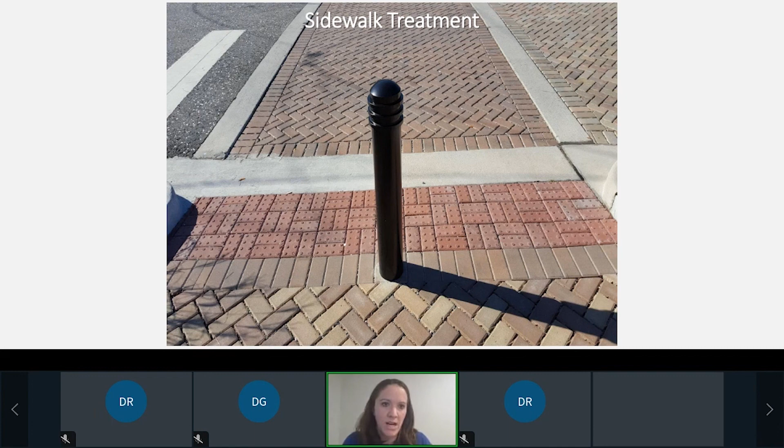Here's an example. These are permeable pavers that have been used. Again, Danny was talking about different layouts and colors and accessibility things. So we've got a tactile walking surface there and different things. You can see nice curbs there for edge restraints.

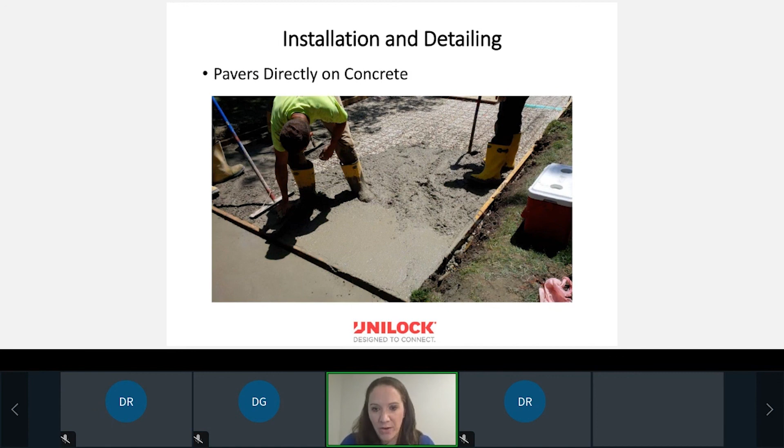A little bit more installation detailing. You can put pavers directly on the concrete without the bedding sand. Make sure that the specifications are lined up, that the concrete's being built correctly, again, with your joints, any of those kinds of things. We just want to make sure there's lots of details and information out there to help you if that is your desire. Again, units can be placed directly right on the concrete.

Here's some examples of edge restraint options. They don't have to be concrete necessarily. This is an example where it's butting in, it's anchored into the ground, moving to a nice, beautiful sidewalk here with our large element pavers. We've got the concrete curb on the right side, but on the left side, we do have an edge restraint in there as well, holding those pavers so they don't move.

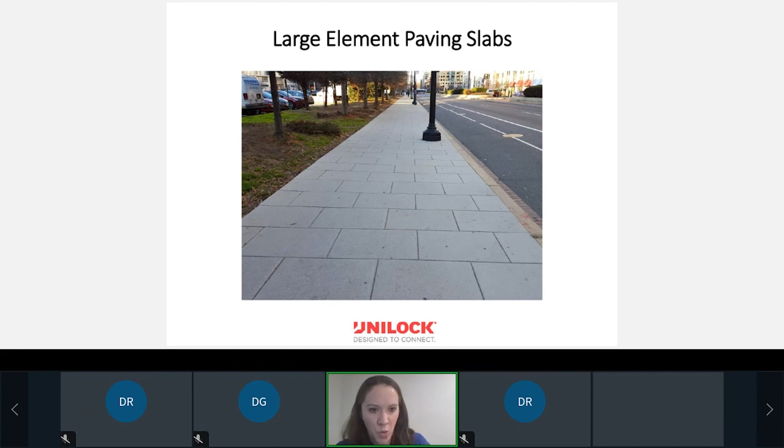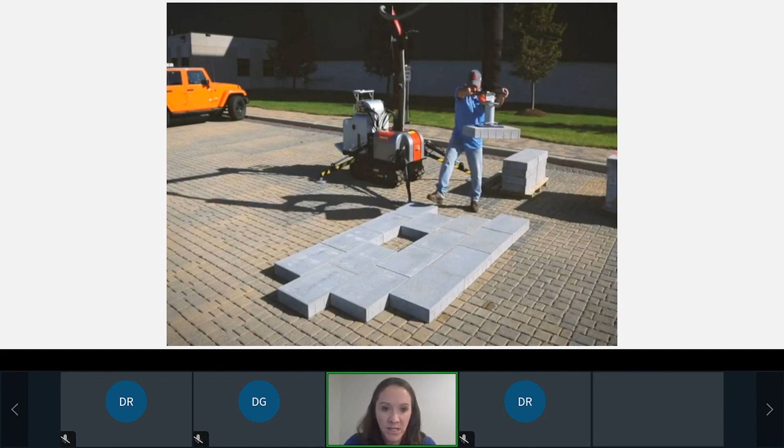If we get into the larger slabs, make sure that we're using proper equipment. Again, this is for the safety of your workers and speed and efficiency. These suckers can get a bit heavy. This kind of equipment has a 300-pound lift capacity.

So I know I raced through that pretty quickly. There's lots of touch points because it's very, very important, right from the design to construction, specification, materials, all that kind of stuff, maintenance. It's all really, really important. But I just hope you learned a little bit something. If you have questions, I'm more than happy to answer them. We can talk offline as well.

But basically, why pavers are really great is they can provide a high quality, long lasting surface. Again, you can move them and replace them. That's why I really like them. We want to make sure that we design them for appropriate traffic levels, site conditions. Drainage is very, very important. Always make sure that your transition treatments, your edge restraints, your curbs, your gutters, all those things are designed properly. And make sure that everybody involved understands, from the designers, the constructors, the QA, all that kind of stuff. Really, really important. And your maintenance.